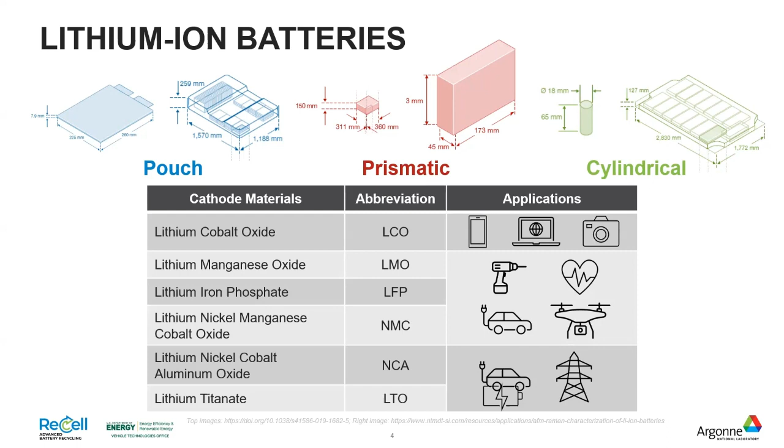Cobalt is one of the most expensive materials that goes into a battery. If you don't see a C in the abbreviation, it doesn't have cobalt. Cobalt helps the battery perform really well. But if it doesn't, that also means, and I'll get into this again through this talk, if there's no C in the abbreviation, it's a lower material value. And so that makes batteries cheaper, but it also makes it tougher to recycle.

So what is in a battery? You have, as I mentioned, the anode and the cathode. The anode is typically graphite. Most of the time there are additives that go into them. The cathode is the chemistries that I showed on the previous slide. And the anode is on a copper foil and the cathode is on aluminum foil.

Kind of mixed in is electrolyte, and that allows the lithium to move from the cathode to the anode. And the separator prevents the anode and cathode from touching. That would be a short circuit, and that creates a lot of heat, and you have a flammable electrolyte, and then you have a fire.

When you make a brand new battery, basically all of the lithium is in the cathode. And when you first charge it, it transitions the lithium. You're using a charger's electrons to push the lithium from the cathode side to the anode side. And then when you want to discharge it, you put a circuit that does not have the push of a charger. And the lithium wants to go back to the cathode.

It's pushing to get back to the cathode. And so you allow it to do that. And you can use that energy as it goes back to the cathode. And so the lithium ion goes back and forth. There's no lithium metal in a lithium-ion battery.

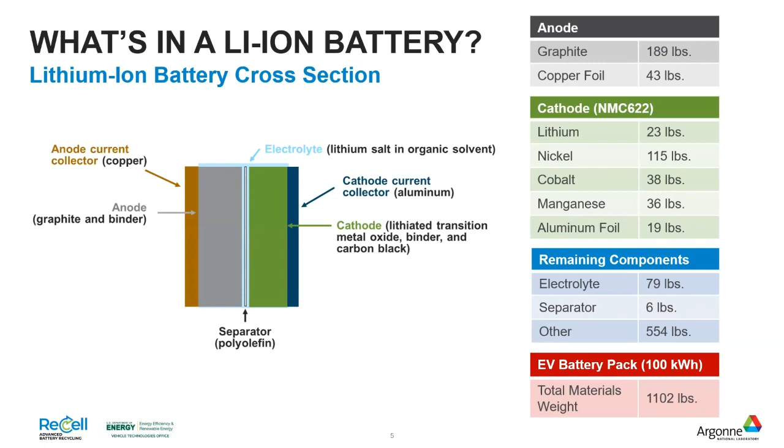On the right of this, you can see a typical, I feel like I shouldn't have put it down to the ones level in pounds, but it shows you an approximate amount of what materials are in a battery. And when you have a lot of batteries, a lot of weight goes into those batteries. The previous slide was for a 100 kilowatt hour NMC 622 battery, so a long range car battery. If you have a lot of cars with those batteries, we need to dig deep.

Nickel, we have even less, and we need even more. We need 52,000. Again, it's about half, 95,000 kilotons. Cobalt is the interesting one. We need 17,000. The United States essentially has 0. And the world reserve is a little over 7,000. So we need to recycle the batteries. That's one of the reasons we need to recycle, in order to get that cobalt back.

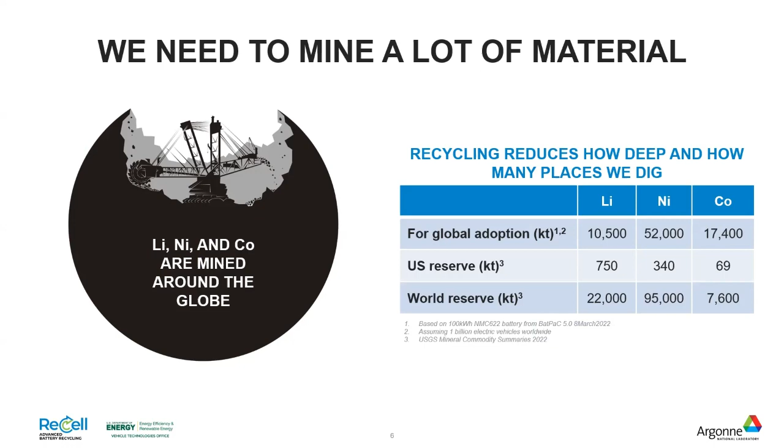There's a lot of work today to get rid of the cobalt use, and it makes a difference, but it doesn't make that big of a difference. We still need so much cobalt because we're making more and more batteries, even though there's less cobalt in each battery. So I want to make it clear that we can recycle today, and we do recycle today. There are two basic process types: hydrometallurgical and pyrometallurgical.

In hydrometallurgical, you dissolve the metallic contents of the battery and then individually precipitate them out. Actually, first you filter out the non-metallics so you can get the graphite out and other materials, like contaminants. And then you can precipitate out or otherwise separate the different metals as metal salts. And then those metal salts can be remade into new batteries over and over. It's not like recycling plastics where there's a degradation. We're going down to ions. And so they're always the same, and you can always make a new battery, just like it's brand new.

Pyrometallurgical recycling is where you use heat to break down the metal components and burn off or oxidize the non-metallic or inert materials.

Then you get a really nice clean alloy with all the good metals, most of the good metals, I should say. And then that alloy is processed through hydrometallurgical processing to dissolve and separate into nice, clean metal salts to make new batteries, or potentially be used in different applications.

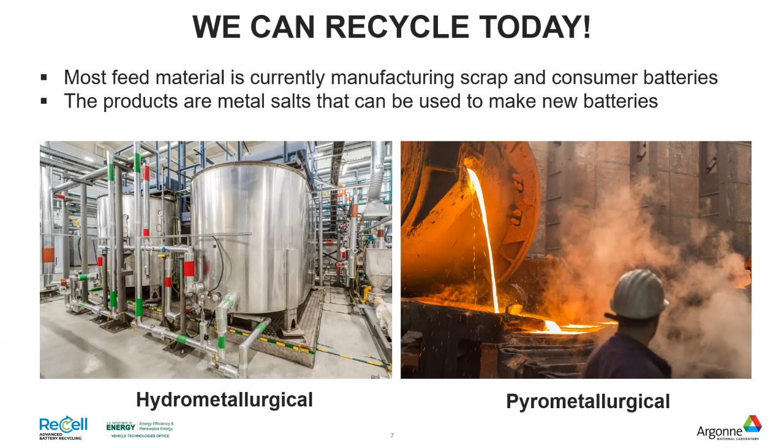So, to talk more about the ReCell Center, the real purpose is to foster the continued improvement of cost-effective, environmentally sound processes to recycle these lithium-ion batteries. As I said in the beginning, we're trying to advance battery recycling. We always improve. We are driven to improve things, reduce cost, make products better. What is it? Bigger, better, cheaper, right?

For reasons that I'll tell you shortly, we research and develop at great length direct cathode recycling. That would be the third recycling process type, and I'll get into that in a little bit. We also like to bring people together from all around the country and all around the world to share their piece of the puzzle. They may be working on a new technology or a new idea. And so we like to connect people. Not one person is going to fix this and continually do the best work. It's going to take everybody that's working on this. And so we like to bring people together.

The outcome, all great stuff. Use less Earth's resources, reduce energy consumption, increase national security. So if we're relying on other countries for materials, that puts us at a precarious position. And recycling can help bring the cost of a battery pack down. It makes a lot more sense to get your materials from a pile of batteries that's filled with those materials than digging through dirt or taking materials from brine.

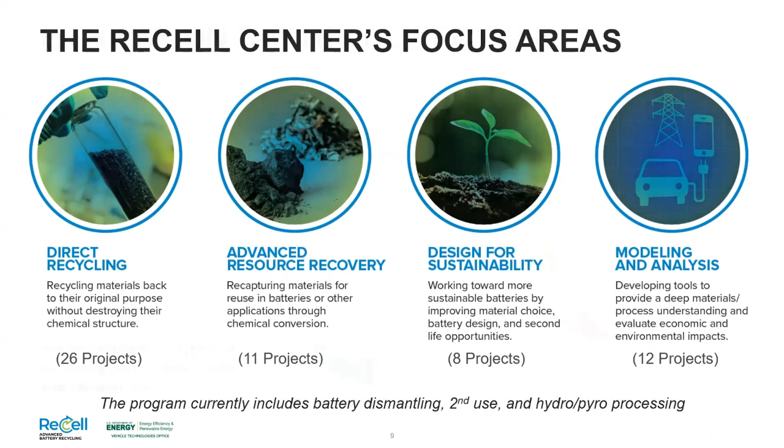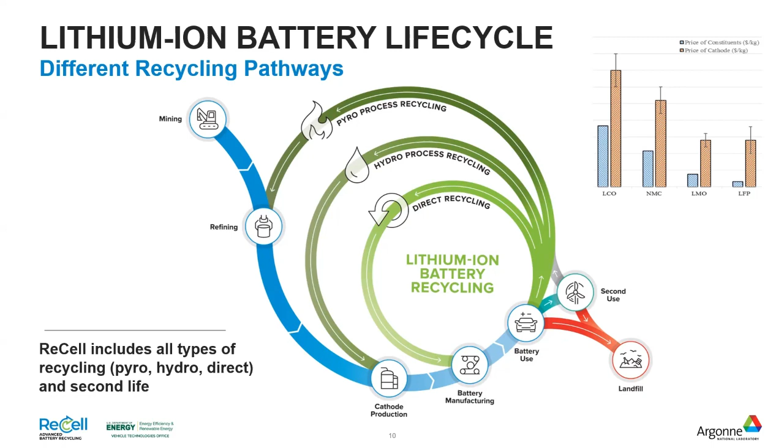And then because a battery fails in part because it doesn't have usable lithium to go back and forth, you have to re-lithiate it. Another big challenge is it's old chemistry. You have a 15-year-old vehicle with 15-year-old battery chemistry, that's not going to cut it today. And so if you want to reuse it in a vehicle, you need to upcycle that cathode to make old cathode perform like new modern cathode. Then we make our new cathode, and then we can make our new batteries and so on and so forth.

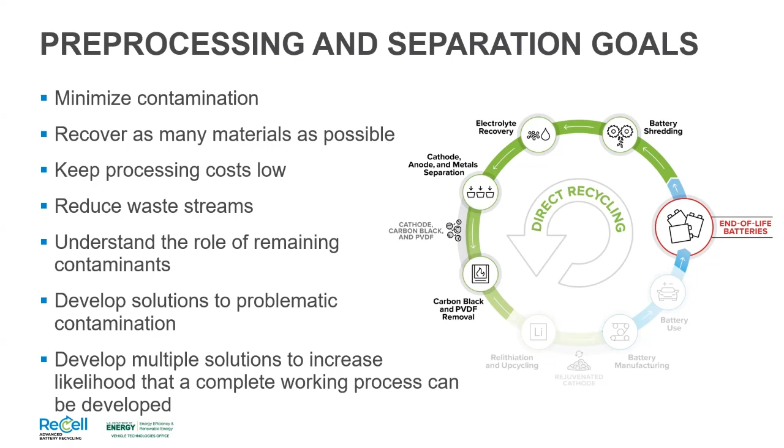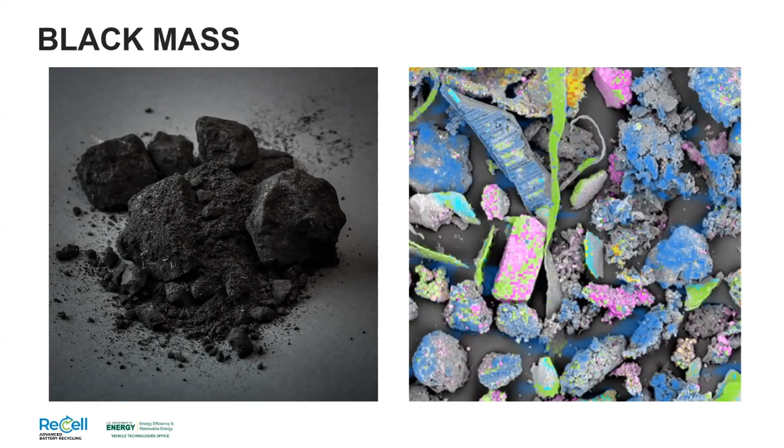And that's what you want to do, because you basically are abrading the active materials off of those foils that I talked about. So we wonder if there's a better way to do it, because when you grind up and you abrade and you beat everything up, there's going to be those contaminants in it. And so what we ended up looking at doing was shear shredding instead, carefully, putting a lot of thought and engineering into shredding the material.

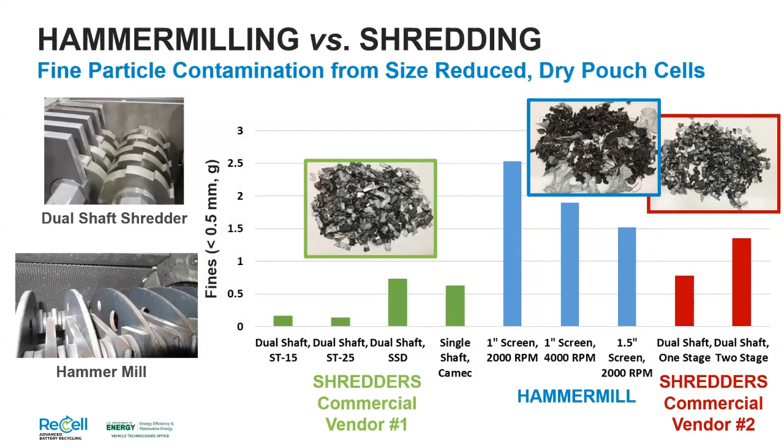And then you have these, as you can see in the pictures, kind of squares. And the active materials stay on the foils. The first pass, you're going to generate some fines, and that's another thing you can see, but it's very low on the lower left, for example. And so you screen out those fines, and then a lot of the contaminants originating there are gone. Now you need to separate the anode and the cathode, and we're doing, again, several ways to do this. This is just one way.

This is using a magnet, a very strong magnet, but a magnet that you can see. And the work here is actually about checking the sizes and how it affects it. But the smaller, the better. So the smaller, the more fines you're going to generate. With a 1/4-inch electrode, so 1/4-inch square, you can see the color difference. One is going to be the anode and one is going to be the cathode. And you can see how effective that separation is.

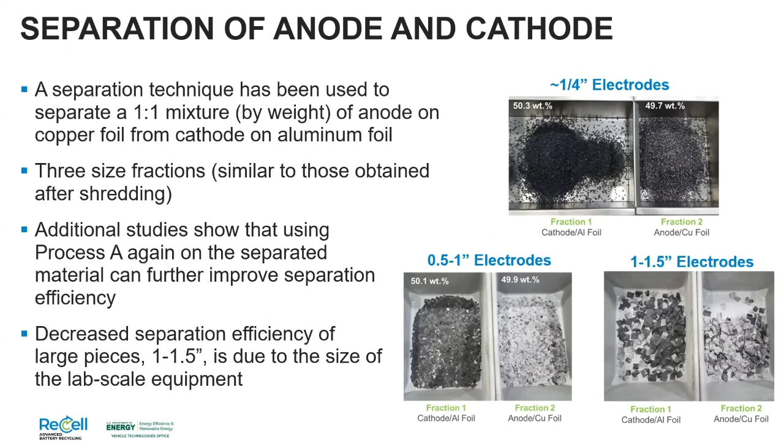The problem is now, how do you get it off? And so here is, again, just one opportunity to do that. On the left are squares of an electrode. And Oak Ridge has actually come up with a solvent that we call SolveX, that you can put on the foils or the electrodes, and the active electrode material actually falls off from the foil, and then you can redissolve it and cast a new electrode, essentially, and it works really well. So that's one way to get the materials back, and very clean.

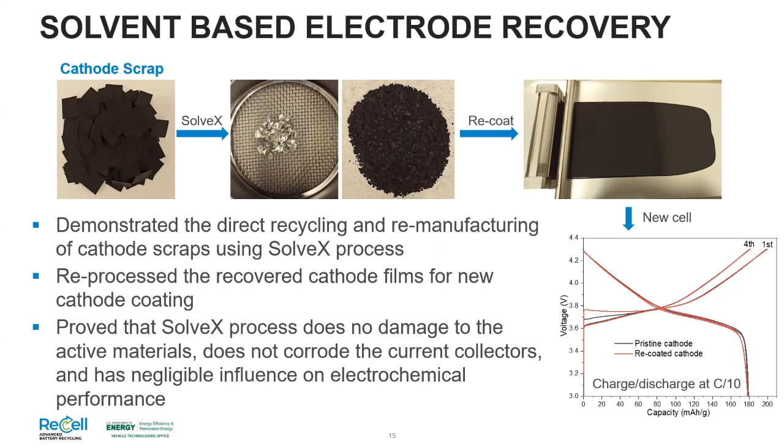Those are just a couple of projects that we talk about. There's plenty that we tackle. To mention a few, in the direct recycling focus area, we look at the cell pre-processing, like I just mentioned. We look at electrolyte recovery, binder removal, anode cathode separation, cathode separation if you have different chemistries mixed together, relithiation, anode recovery, upcycling of those recovered cathodes and impurity effects.

For advanced resource recovery, we have hydromet, pyromet, and electrochemical metals recovery. Again, this is several, but not all of them. Design for sustainability, we're looking at reuse of materials, second-life batteries, and disassembly techniques. And in modeling and analysis, I'll talk more about that, but I'd like to make sure that I mentioned that we have EverBatt, which I have some slides on. That's a cost and environmental calculation tool for recycling. And then there's also a supply chain model that NREL leads, it's called LIBRA. So we got all that out.

We had the focus areas, which were a little bit different. I won't get into that. Mostly bench scale tests were being experimented with. People had new ideas and were testing new ideas. We review each project in EverBatt. And then some of the more promising technologies that were further along, we scaled up. And then we demonstrated that direct recycling of cathode from end-of-life batteries can actually be done. Some people said it's not going to work, or it's not going to work well. And so we put together a real test to just demonstrate it.

No, it was messy. It wasn't clean and simple. We went from one bench unit to another to go through the stages to make that material and make new batteries and testing. And you can see on the second bullet here, we actually did get 175 milliamp-hours per gram from a 622 recycled chemistry. We generated over 20 inventions and over 40 publications.

We don't hide too much. We're trying to help the United States. And so we get the information out there, which is kind of nice. We're not a business. We're not trying to make money. We're basically a nonprofit. And so the objective is to help other people succeed.

Also, manufacturing scrap is a great opportunity for direct recycling. So we've looked at that closely. It doesn't have as many of the challenges that we have when we do end-of-life batteries. The big example is it's not 15 years old now. It's brand new. And sometimes it's really not even the whole battery. It's just part of the battery. It could be an electrode that wasn't running up to spec or whatever it is. And so we can rework it and put it right back on the front of the line.

So the main objectives in 2023 and beyond is to continue growing the collaboration, obviously, and continue engaging with industry. We did update the focus areas as to the way I described it in the beginning. But we're really excited about adding about 12,000 more square feet to our research space. I have a drawing on my next slide that'll give you an idea of how much more that is. That's going to allow us to install a pilot scale plant for research purposes, not just to run all day and night. It's really so that we can test different unit operations at pilot scale.

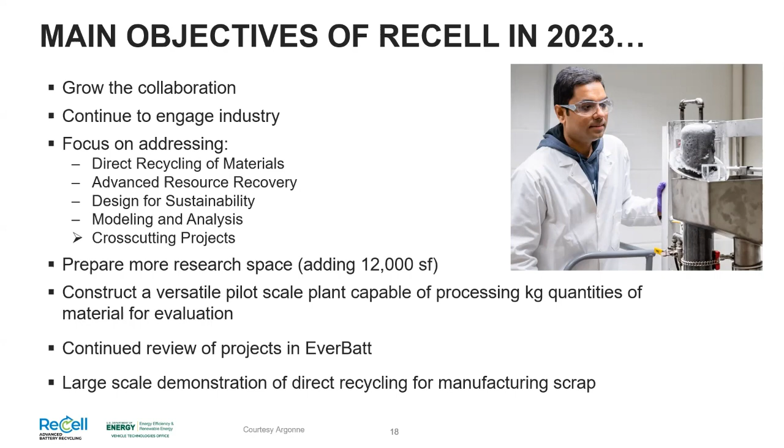And we did the demonstration of direct recycling. We want to do a larger scale demonstration now. And we'll focus on manufacturing scrap first.

And this is actually exciting because we can now work closer to industrial scale, because you can't just go from bench scale to industrial scale. There's steps, usually a factor of 10 that you're going to go. So this is the next one.

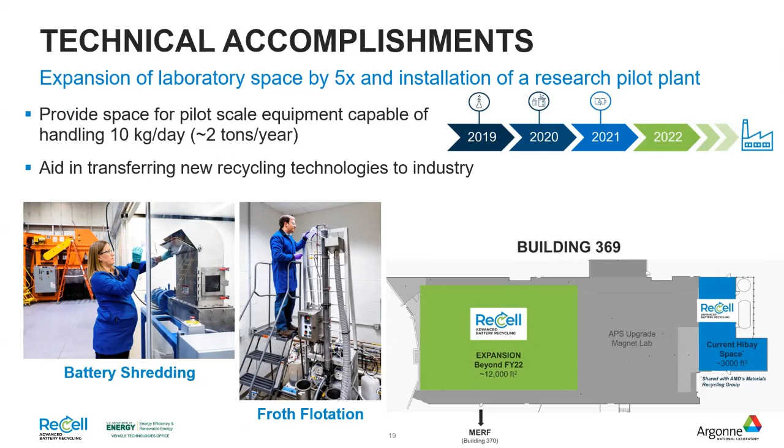We were looking at recycling processes, and then we have also cathode manufacturing processes. And so all we needed to do was add a couple more steps, and we had a complete recycling circular path. I'll show a slide in a couple slides from now on the output of the model, but it makes it really easy to look wide angle to say, for example, design for recycle. It costs more to make a battery because it has an easily undoable part. So you spend more, but then you can see in the recycling process how it changes. You can see that maybe it costs $1 more to make a battery, but if you go through the recycling process, you'll save $2. And so it does make sense. And so it helps you visualize that.

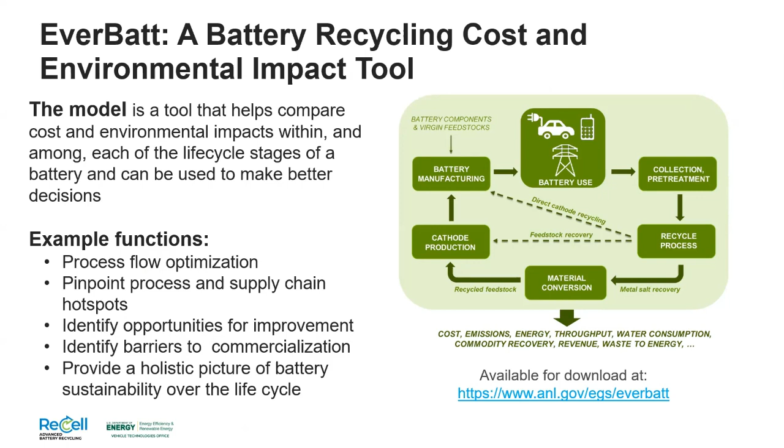And because it's Excel based and it's free to download, and we're here to help you use it, this can be a very sophisticated tool to help you develop cost and environmental impacts from battery recycling. It's actually done so well that we've started using it under the EverGreen suite of models. So it can be a product, it could be a material, but if you look at similar model methodologies, you can develop similar results and help advance your research.

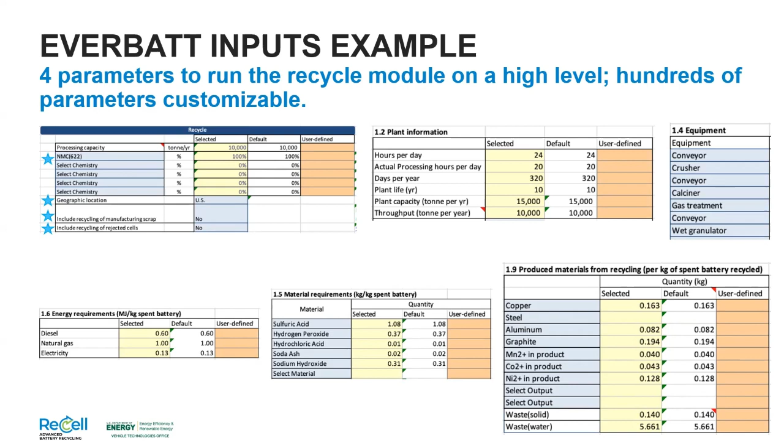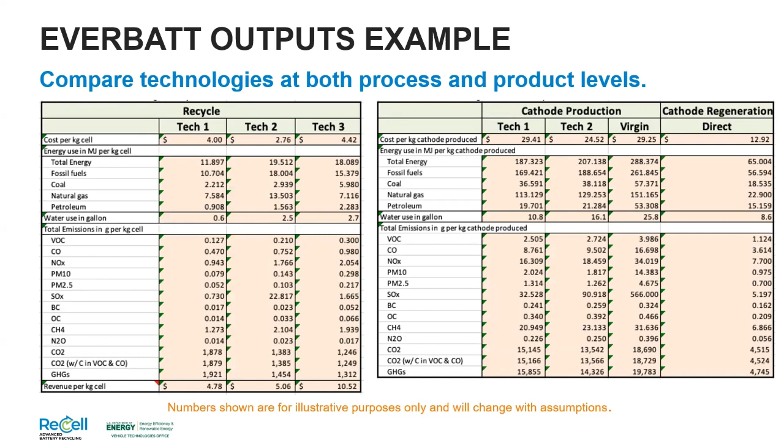So this, I think, you can put them side by side, and this can be manufacturing costs versus recycling costs. Compare anything that you want. And actually, to digress a little bit, we took that methodology, and now, just like we do in some of the recycling processes, we have the IMPACT model, which is for manufacturing and process assessments. This is for advanced manufacturing, but it does the same thing. Cost and environmental outputs are all the same, and the inputs will be different because it's a different process. But this helps us as a research institution better advance process technologies.

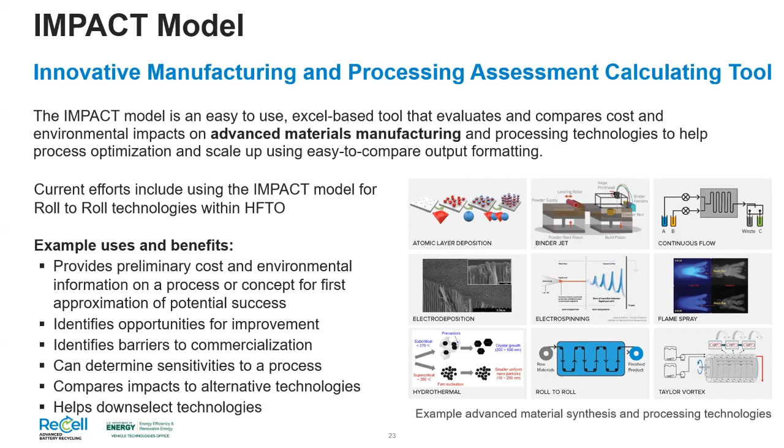And we have, as I mentioned, the ReCell industry meeting. As I mentioned, the group works with industry so closely. So it was interrupted by COVID, but I'll call it annually. And we have one coming up in May, an industry collaboration meeting. And this gets all the different stakeholders together to hear everybody's perspectives and challenges and thoughts, really to hopefully break down the barriers and not get you to focus on your problem, but to learn about others and how you can help them. And it gets you in the mix of a bunch of people that you can make new contacts with.

So this has been great. It had, I forget, about 180 folks that came to this last one in April of '23. And that was from just under 100 different institutions. So it's a good mix of people.